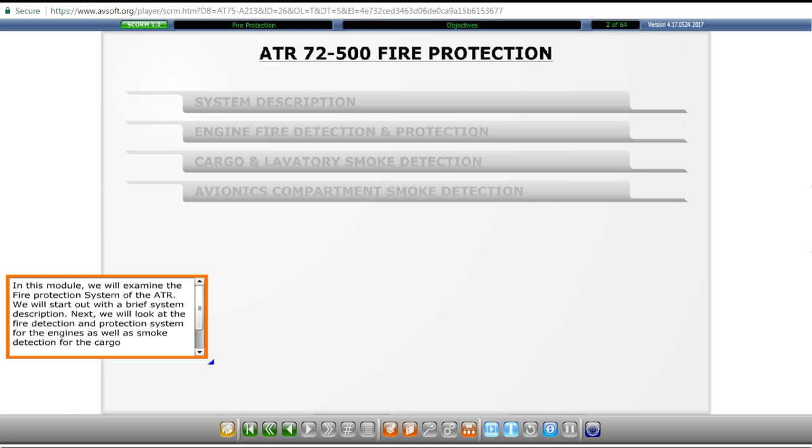In this module, we will examine the fire protection system of the ATR. We will start out with a brief system description. Next, we will look at the fire detection and protection system for the engines as well as smoke detection for the cargo compartments and the lavatory. Following that, we will look at the avionics compartment smoke detection system.

Each engine incorporates a fire detection and fire protection system. The right engine nacelle also incorporates an overheat detection system that operates when the aircraft is on the ground. If an overheat is detected in the right engine nacelle, the centralized crew alerting system will provide a warning to the crew.

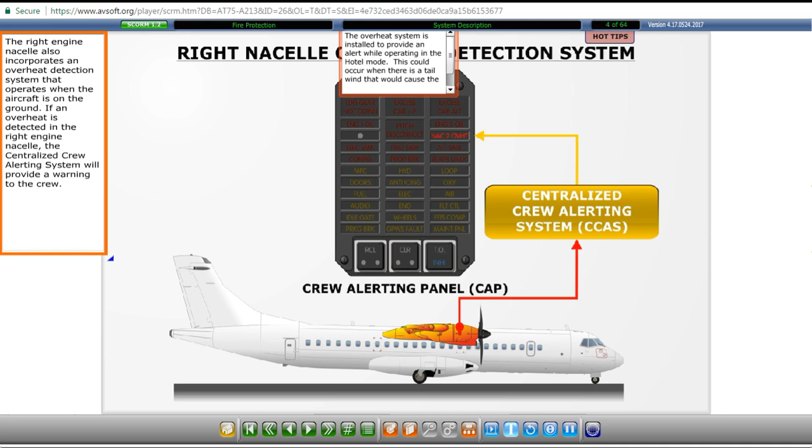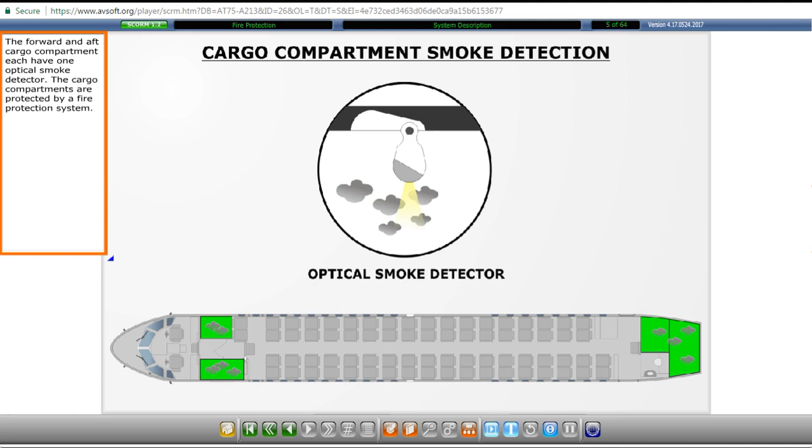The forward and aft cargo compartment each have one optical smoke detector. The cargo compartments are protected by a fire protection system. The lavatory uses a photoelectric smoke detector to provide an alert in the event there is smoke in the lavatory. A small fire protection bottle protects the lavatory waste bin.

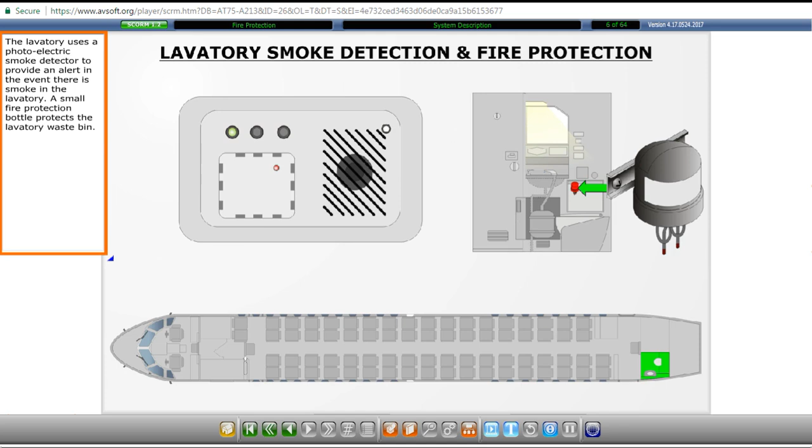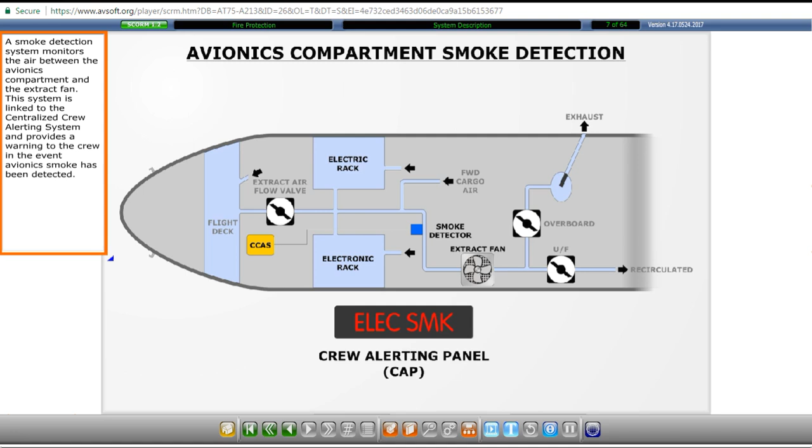A smoke detection system monitors the air between the avionics compartment and the extract fan. This system is linked to the centralized crew alerting system and provides a warning to the crew in the event avionics smoke has been detected.

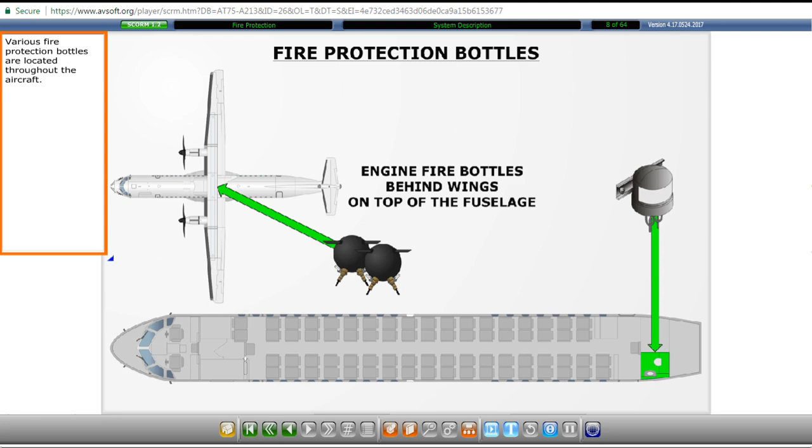Various fire protection bottles are located throughout the aircraft. The controls and indicators associated with the fire protection system are located on the overhead panel and the condition levers.

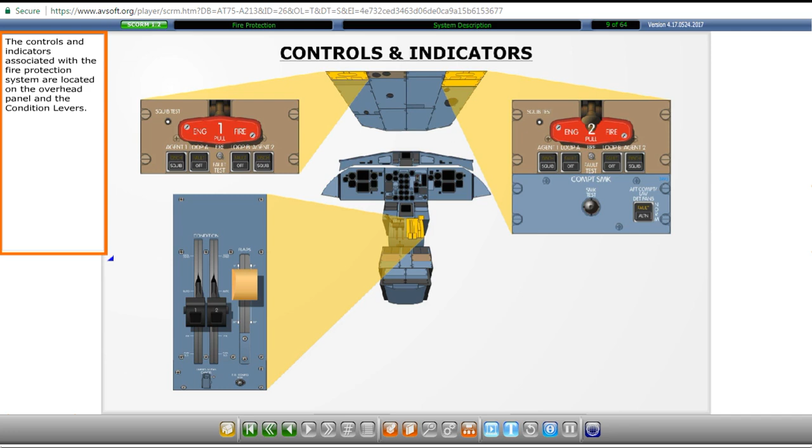Each engine incorporates a fire detection system. The system consists of two identical detection loops called Loop A and Loop B. These loops are parallel to each other and they are connected to a fire detection control unit. The loops are powered by the DC emergency bus.

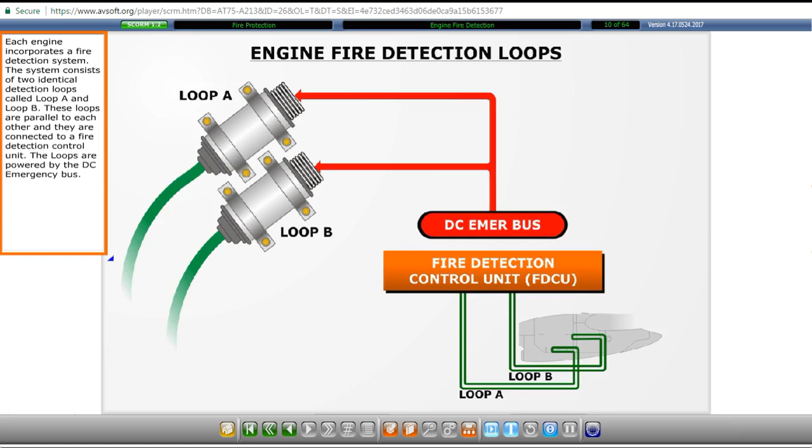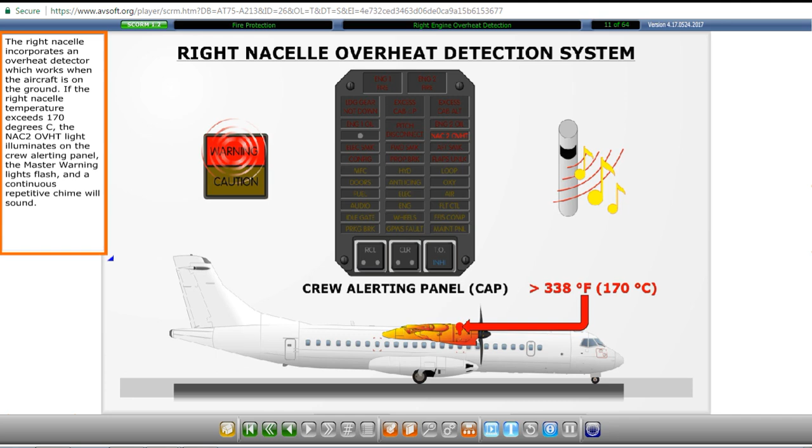The right nacelle incorporates an overheat detector which works when the aircraft is on the ground. If the right nacelle temperature exceeds 170 degrees Celsius, the nacelle 2 overheat light illuminates on the crew alerting panel, the master warning lights flash, and a continuous repetitive chime will sound.

In the event of a nacelle overheat warning in hotel mode, the right engine power lever should be brought to ground idle and the condition lever to feather, then fuel shutoff.

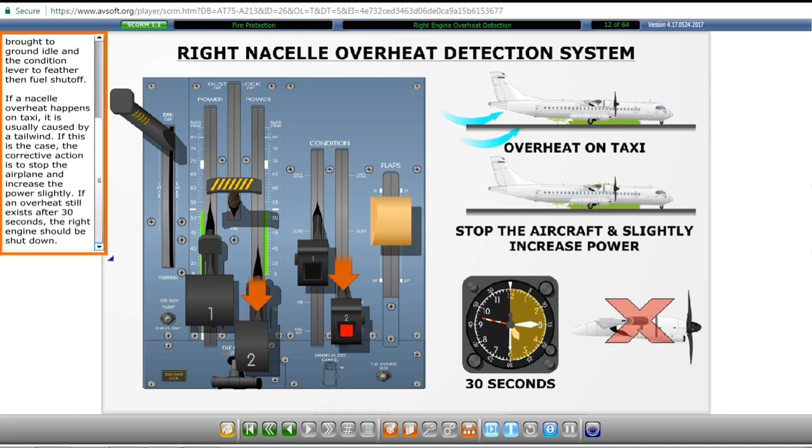If a nacelle overheat happens on taxi, it is usually caused by a tailwind. If this is the case, the corrective action is to stop the airplane and increase the power slightly. If an overheat still exists after 30 seconds, the right engine should be shut down.

Each detection loop consists of a nickel core coated with a thin eutectic salt-based layer. This core is contained in a sheath made of stainless steel. The salt changes resistance with changes in temperature.

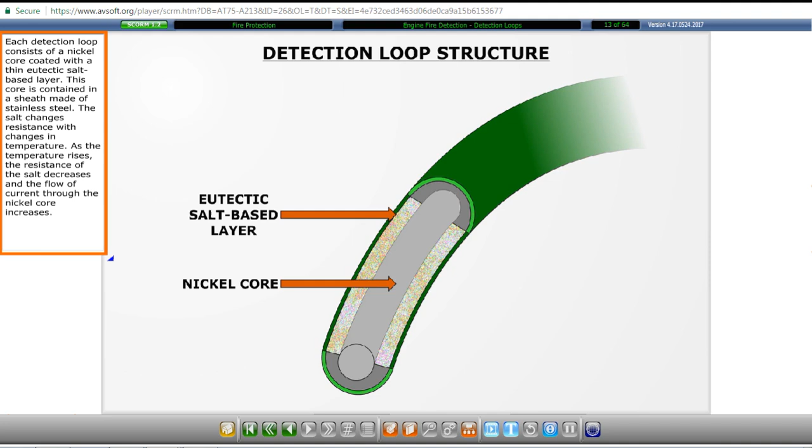As the temperature rises, the resistance of the salt decreases and the flow of current through the nickel core increases. The electrical signal flows in a continuous loop to the Fire Detection Control Unit, or FDCU. The FDCU measures the resistance in the loop as well as the capacitance.

The FDCU will trigger a fire warning if there has been a decrease in resistance and an increase in capacitance of both fire loops. Both loops must detect a fire in order to trigger a fire warning.

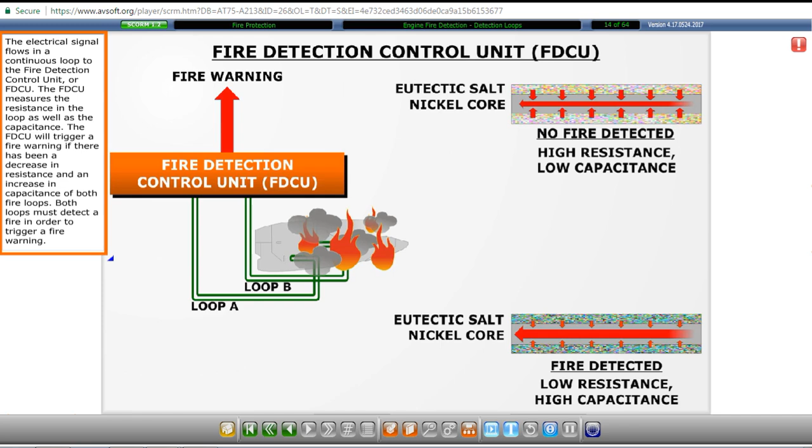If an engine fire has been detected, the continuous repetitive chime will sound, the master warning light will flash, the associated fire handle will illuminate red, a red fuel shutoff light will illuminate in the associated condition lever, and the associated engine fire light on the crew alerting panel will illuminate.

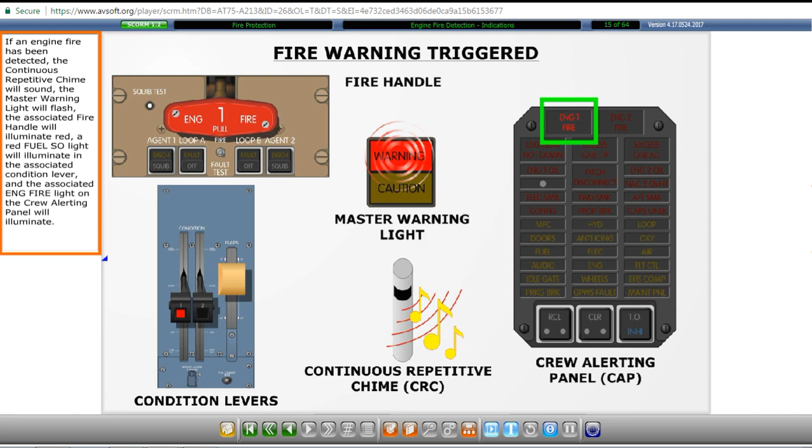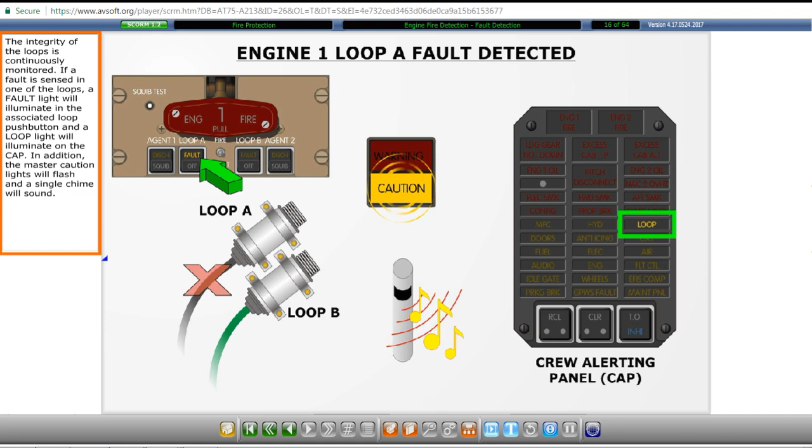The integrity of the loops is continuously monitored. If a fault is sensed in one of the loops, a fault light will illuminate in the associated loop push button, and a loop light will illuminate on the crew alerting panel. In addition, the master caution lights will flash and a single chime will sound.

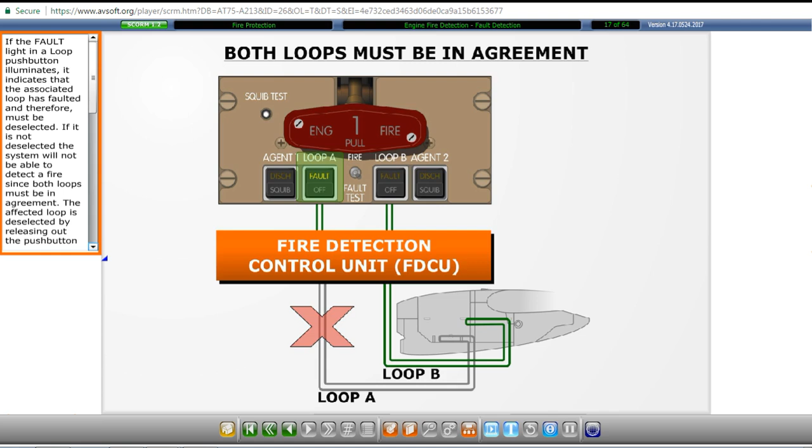If the fault light in a loop push button illuminates, it indicates that the associated loop has faulted and therefore must be deselected. If it is not deselected, the system will not be able to detect a fire since both loops must be in agreement.

The affected loop is deselected by releasing out the push button with the illuminated fault light. This reconfigures the associated fire detection system so that only the other fire detection loop is used to detect an engine fire. Click on the loop light with the illuminated fault light to reconfigure the system.

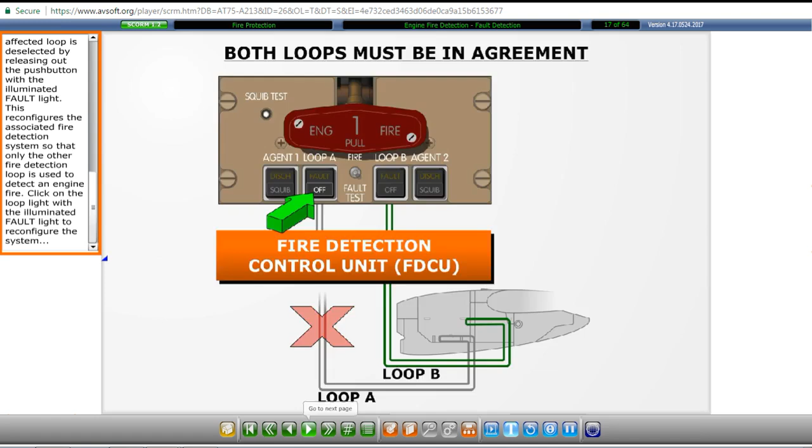If there were a break in one of the loops, the system could still detect a fire since both sections were still connected to the controller. However, if there are two breaks in a loop, there would be a segment of the loop that is not connected to the controller, and this section would be unable to detect a fire.

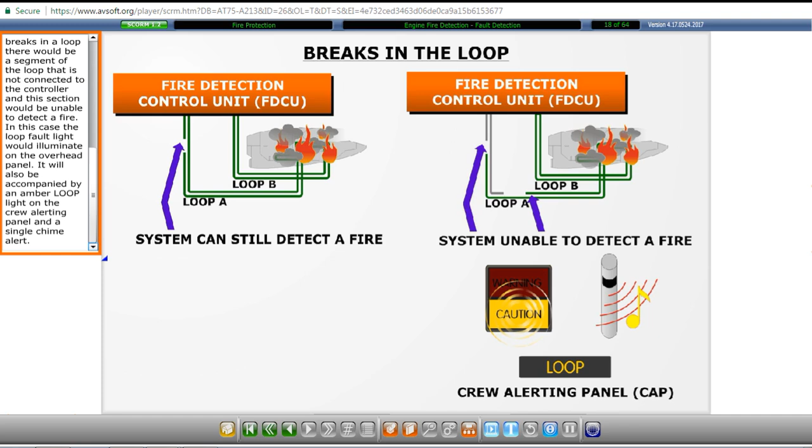In this case, the loop fault light would illuminate on the overhead panel. It would also be accompanied by an amber loop light on the crew alerting panel and a single chime alert. Note that a broken loop would cause an increase in the resistance of the circuit, but since there were no increase in capacitance, a fire warning would not be triggered.

Conversely, excessive heat in an engine compartment can trigger a fire warning even if there is no fire, for instance from a bleed leak. In this case, don't fire the bottle until it is determined that closing the bleed valve doesn't silence the fire warning.

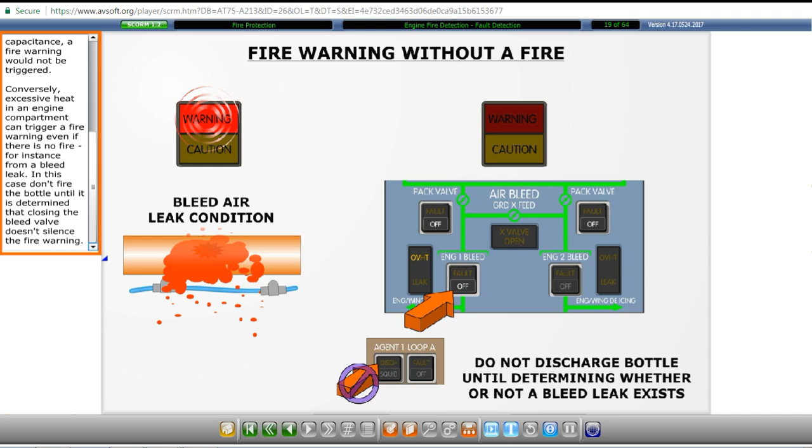Once a loop has been deselected, the off light in the associated loop push button illuminates.

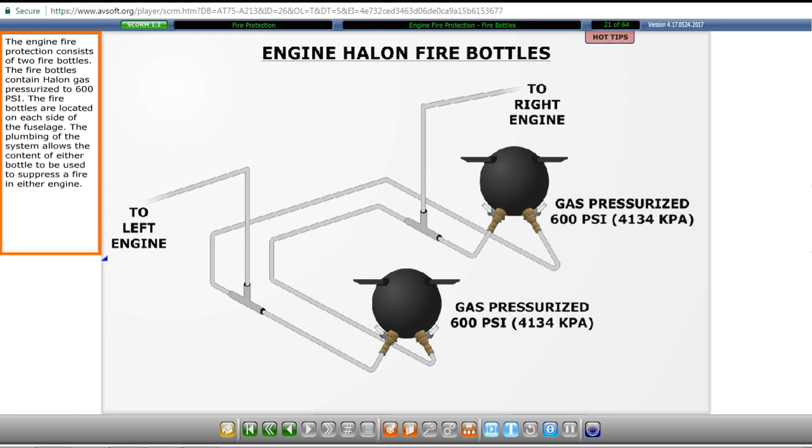The engine fire protection consists of two fire bottles. The fire bottles contain halon gas pressurized to 600 psi. The fire bottles are located on each side of the fuselage. The plumbing of the system allows the content of either bottle to be used to suppress a fire in either engine.

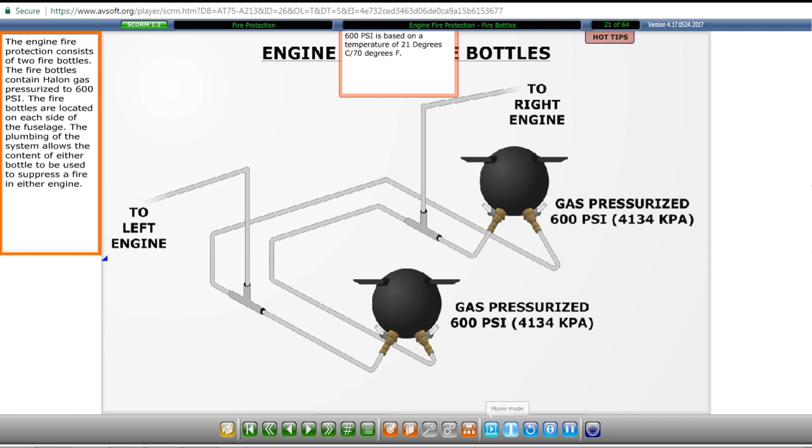The gas in the fire bottles is retained by seals. There are 2 seals per bottle. Gas is released into an engine by firing a squib which punctures the associated seal and allows the halon to flow through the associated line and into the associated engine. The squib consists of a pyrotechnic charge that is electrically detonated. Each squib can only be fired once.

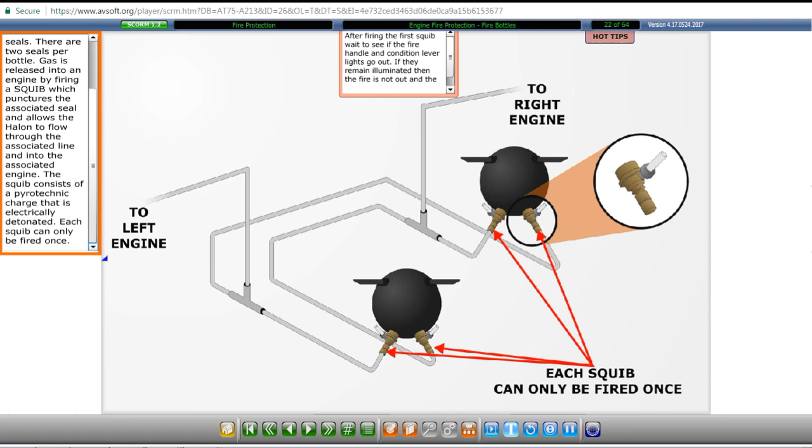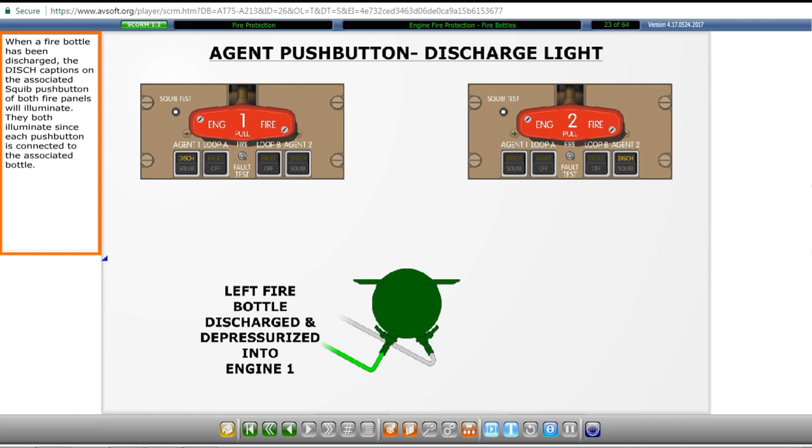When a fire bottle has been discharged, the discharge captions on the associated squib push button of both fire panels will illuminate. They both illuminate since each push button is connected to the associated bottle.

The fire bottles are plumbed to the engines in such a way that firing Agent 1 into one engine is the same as firing Agent 2 of the other engine. For example, if you fire Agent 1 into the left engine, the Agent 1 discharge light illuminates on the overhead panel for that engine. At the same time, the Agent 2 discharge light illuminates for the right engine on that side of the overhead panel.

2 identical engine fire panels are located on the overhead panel. Each incorporates a fire handle, loop push button, and 2 agent push buttons.

When a fire has been detected, the associated fire handle will illuminate red. In addition, the continuous repetitive chime will sound, the master warning light will flash, a red fuel shutoff light will illuminate in the associated condition lever, and the associated engine fire light on the crew alerting panel will illuminate.

Click on the illuminated fire handle to continue.

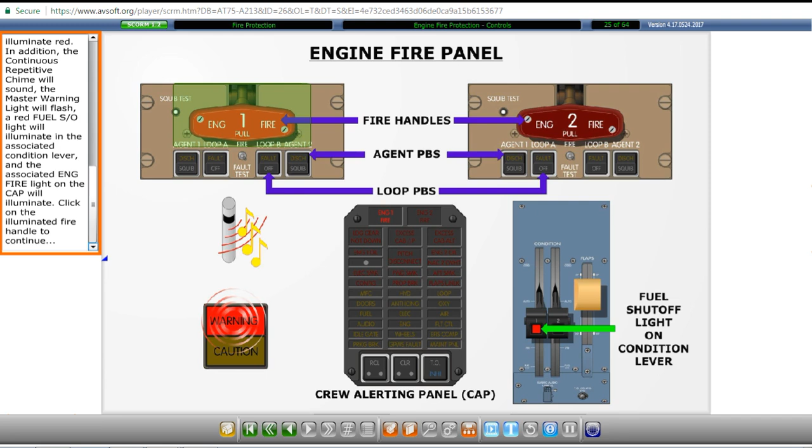The fire handles are mechanically locked by safety-wired spring latches. A latch can be thumb-released in order to allow the fire handle to be pulled down. Make sure that the handles are pushed in prior to pre-flight checking the system.

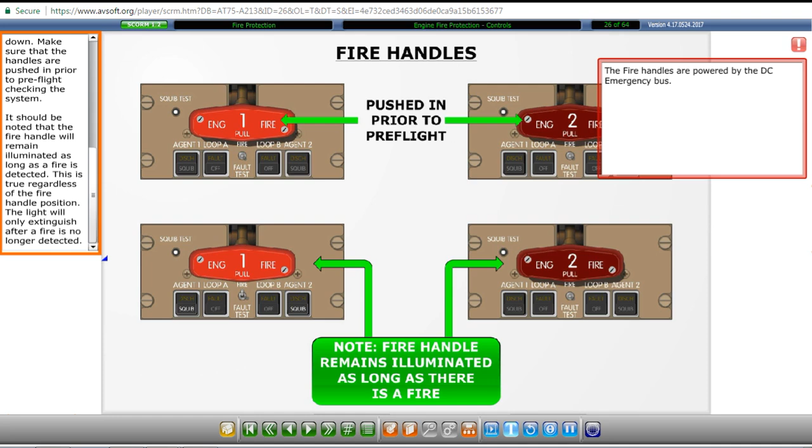It should be noted that the fire handle will remain illuminated as long as a fire is detected. This is true regardless of the fire handle position. The light will only extinguish after a fire is no longer detected.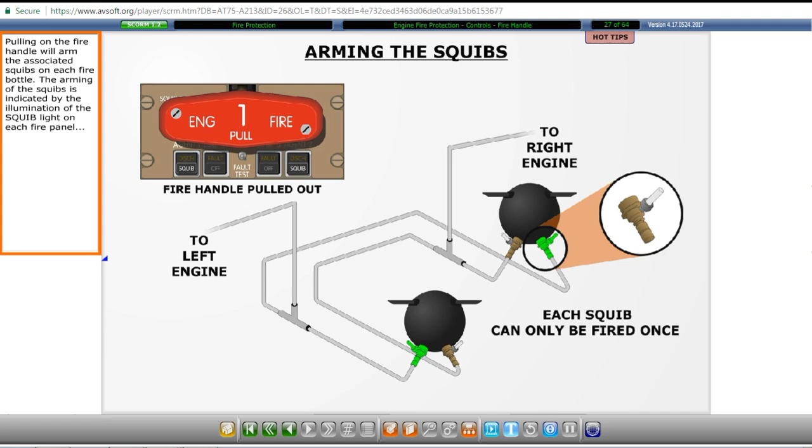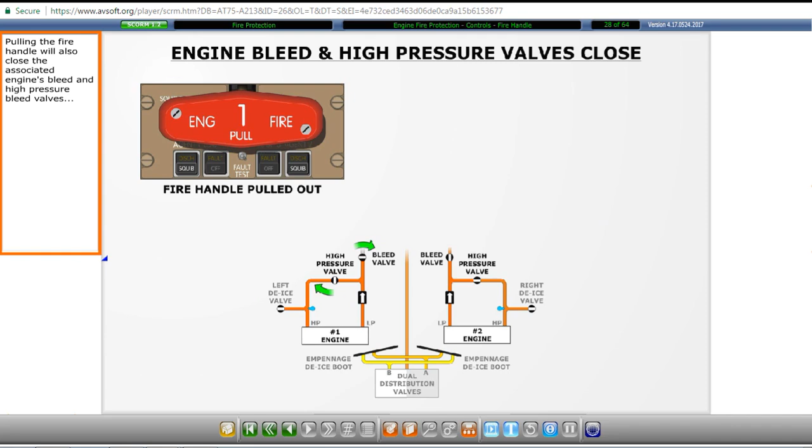Pulling on the fire handle will arm the associated squibs on each fire bottle. The arming of the squibs is indicated by the illumination of the squib light on each fire panel.

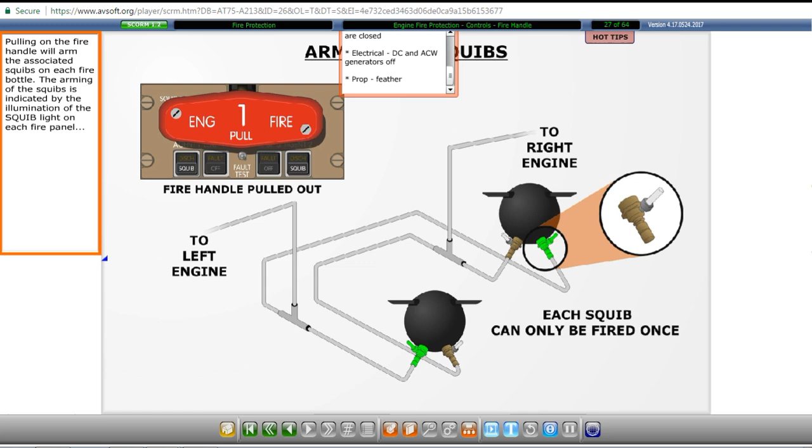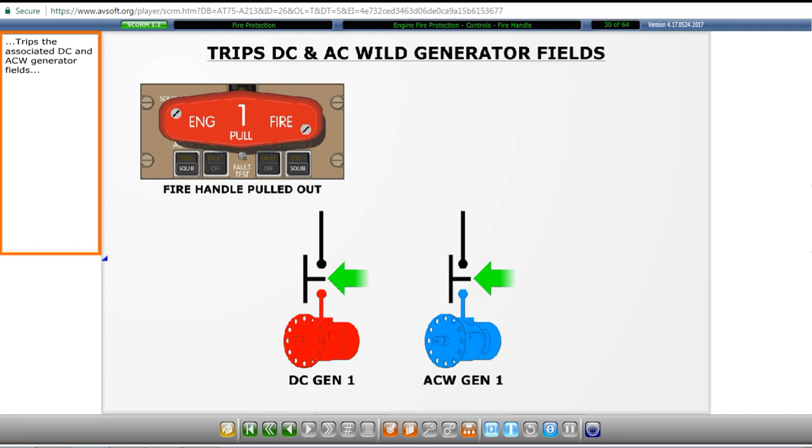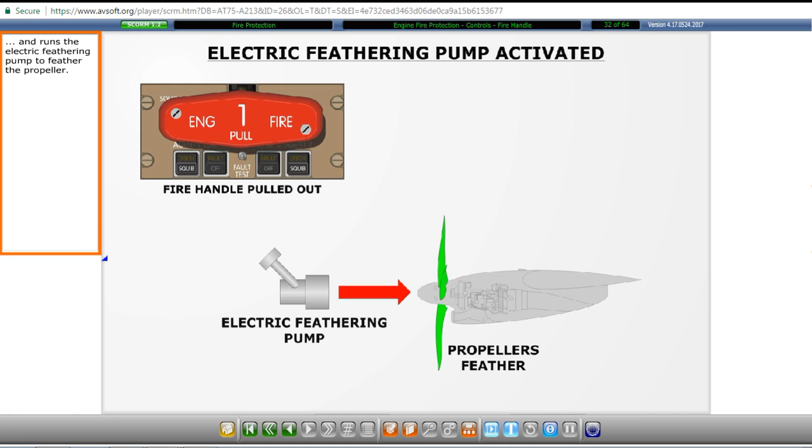Pulling the fire handle closes the associated engine pneumatic de-ice valve and isolation valve, trips the associated DC and AC wild generator fields, closes the engine's low-pressure fuel valve, and runs the electric feathering pump to feather the propeller.

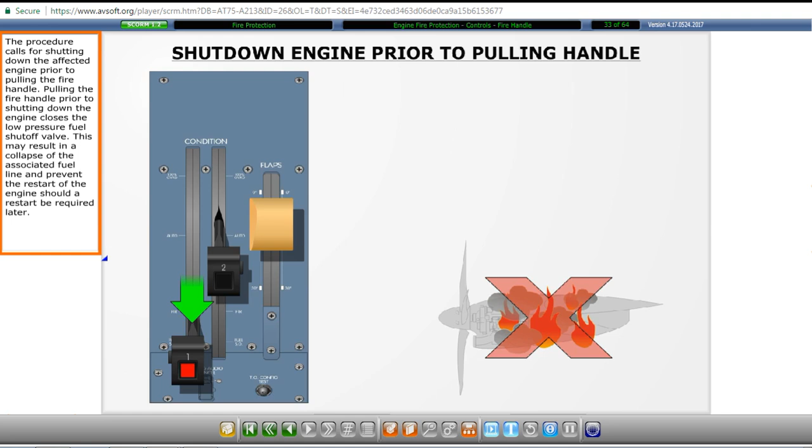The procedure calls for shutting down the affected engine prior to pulling the fire handle. Pulling the fire handle prior to shutting down the engine closes the low-pressure fuel shutoff valve. This may result in a collapse of the associated fuel line and prevent the restart of the engine should a restart be required later.

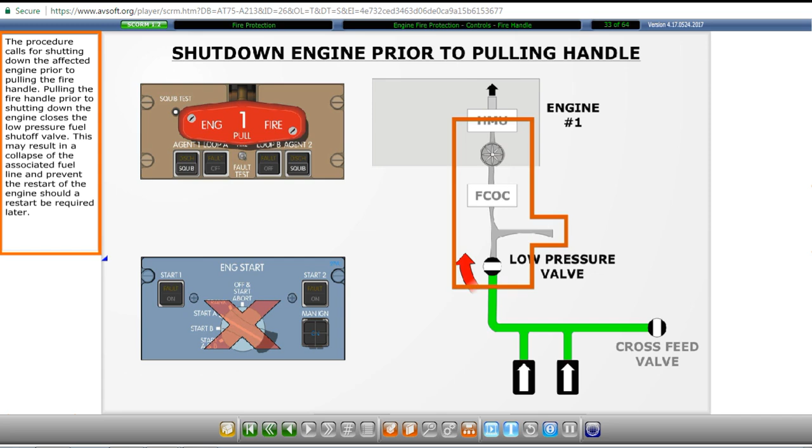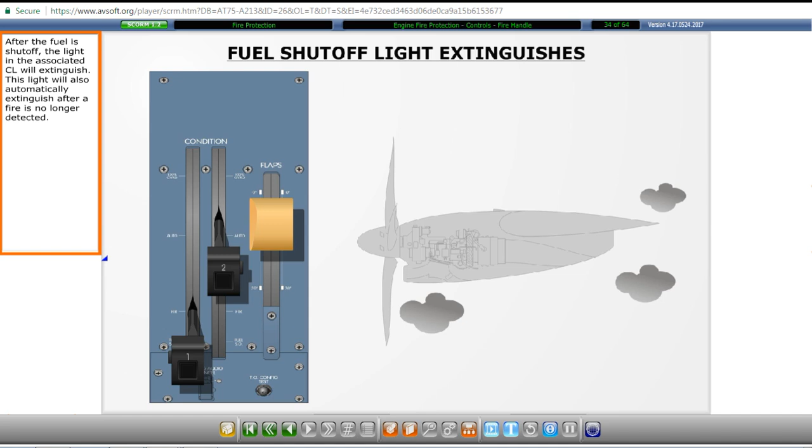After the fuel is shut off, the light in the associated condition lever will extinguish. This light will also automatically extinguish after a fire is no longer detected.

After a fire handle has been pulled, one of the fire bottles can be discharged into the engine by pressing one of the illuminated squib lights. Pressing a squib push button sends an electric charge to the associated squib, which fires and punctures the associated seal. This releases the halon into the associated engine. Click on the number 1 squib push button to fire the bottle into the left engine.

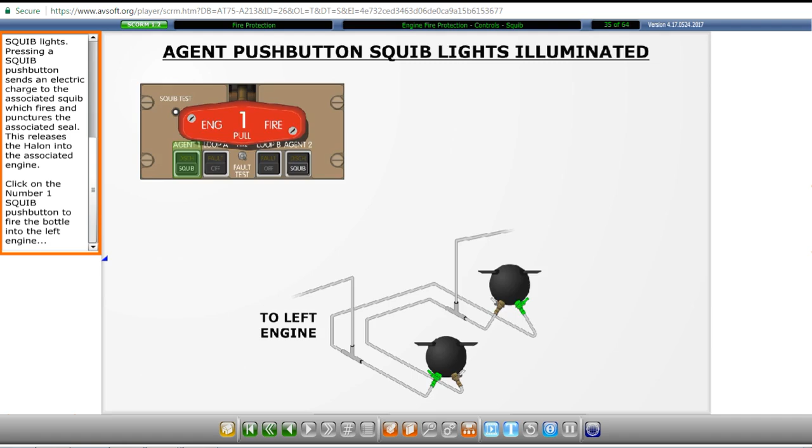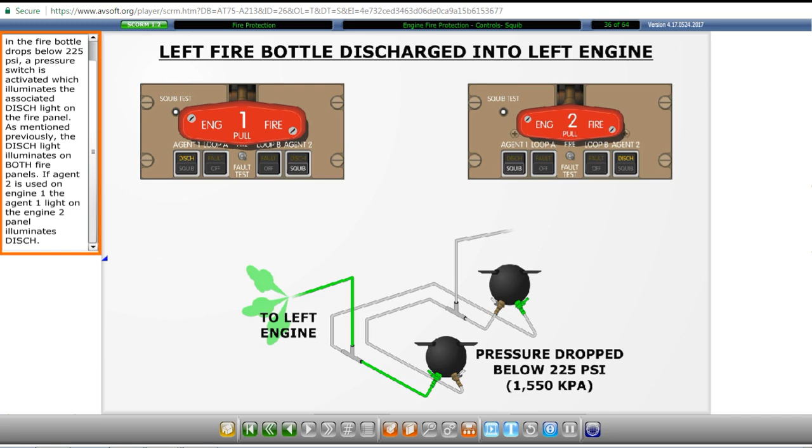When pressure in the fire bottle drops below 225 psi, a pressure switch is activated which illuminates the associated discharge light on the fire panel. As mentioned previously, the discharge light illuminates on both fire panels. If Agent 2 is used on Engine 1, the Agent 1 light on the Engine 2 panel illuminates discharge.

The engine fire protection system is tested with the test switch on the fire panel and is used during pre-flight. The switch is spring-loaded to the neutral position and enables the selection of a fire test or a fault test. Click on the fire position to test the fire protection system.

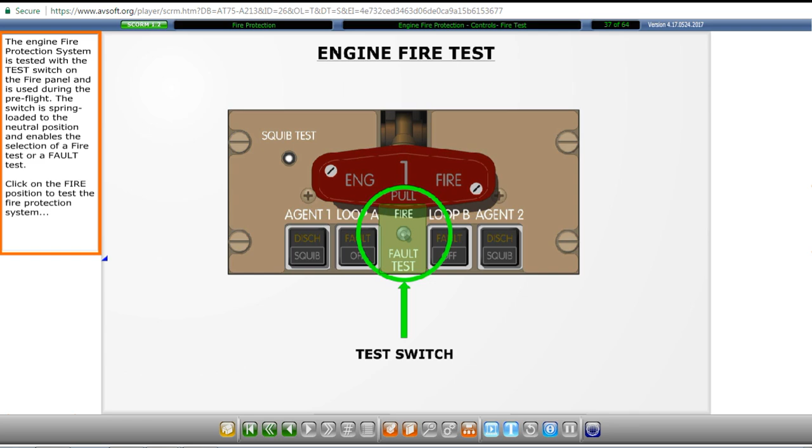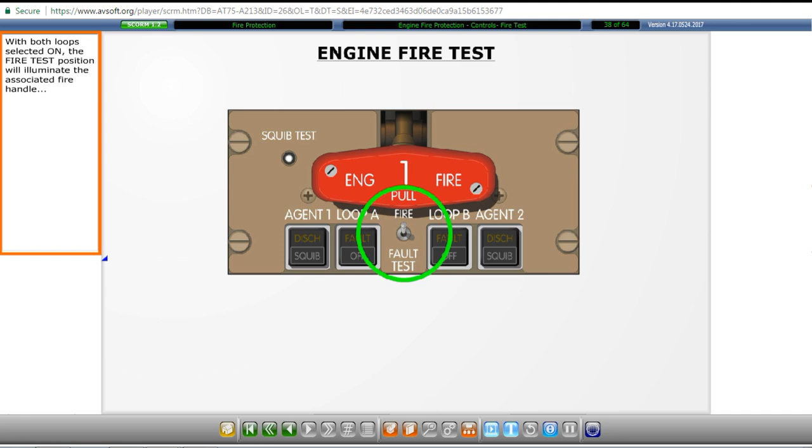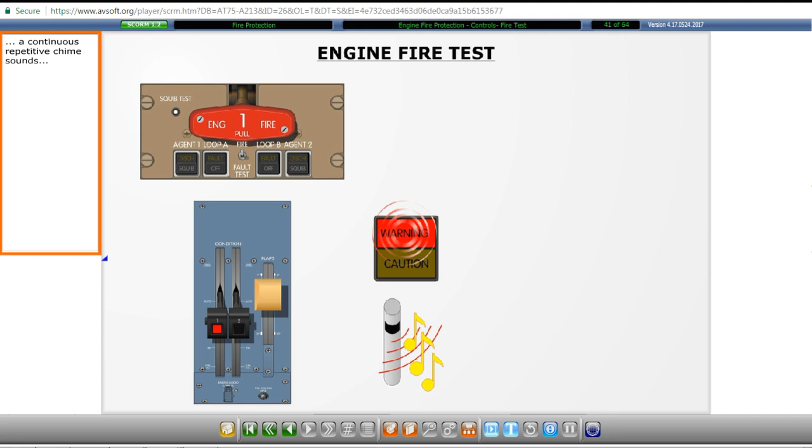With both loops selected on, the fire test position will illuminate the associated fire handle, and illuminate a fuel shutoff light in the associated condition lever if the lever is not in the fuel cutoff position. The red master warning lights will flash, a continuous repetitive chime sounds, and it illuminates the associated engine fire light on the crew alerting panel.

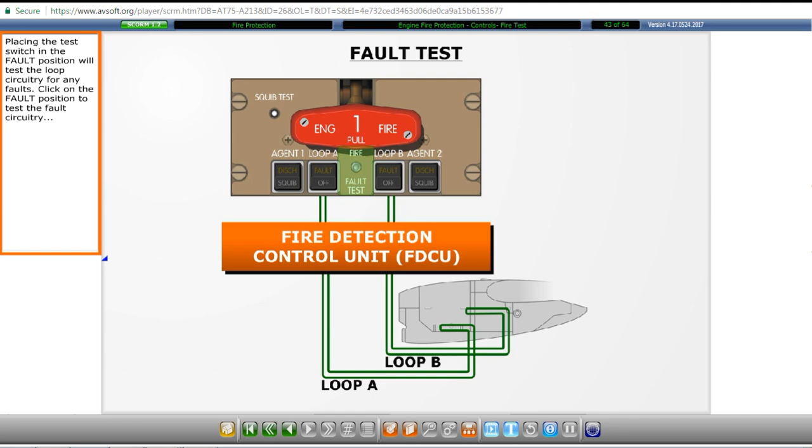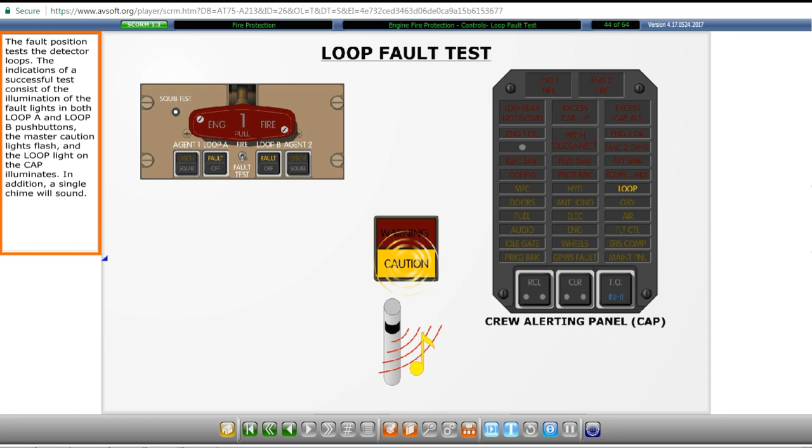Placing the test switch in the fault position will test the loop circuitry for any faults. This tests the detector loops. The indications of a successful test consist of the illumination of the fault lights in both Loop A and Loop B push buttons, the master caution lights flash, and the loop light on the crew alerting panel illuminates. In addition, a single chime will sound.

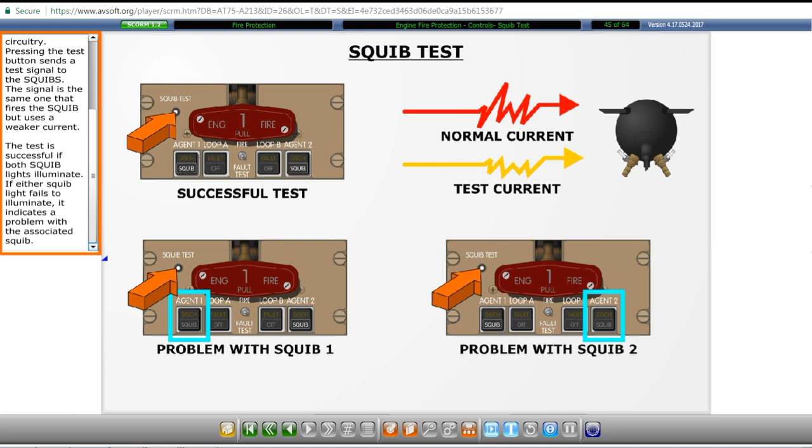The squib test push button is used to check the continuity of the squib circuitry. Pressing the test button sends a test signal to the squibs. The signal is the same one that fires the squib but uses a weaker current. The test is successful if both squib lights illuminate. If either squib light fails to illuminate, it indicates a problem with the associated squib.

Three smoke detectors are installed on the passenger configuration aircraft. One detector is in the forward cargo compartment, and another one is in the aft cargo compartment. The third smoke detector is in the lavatory vent line.

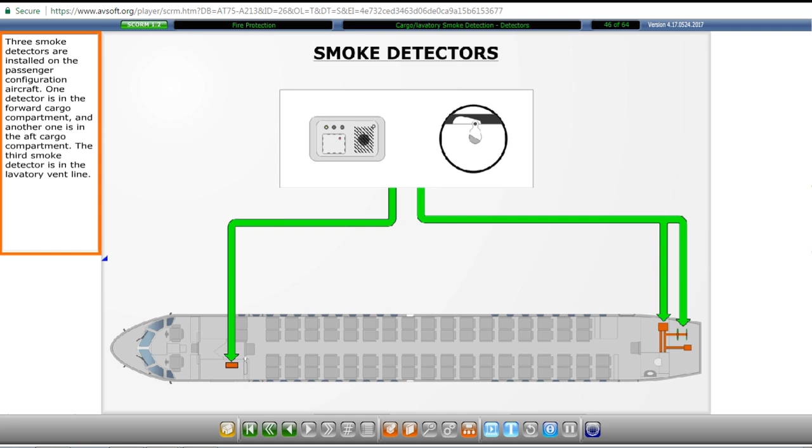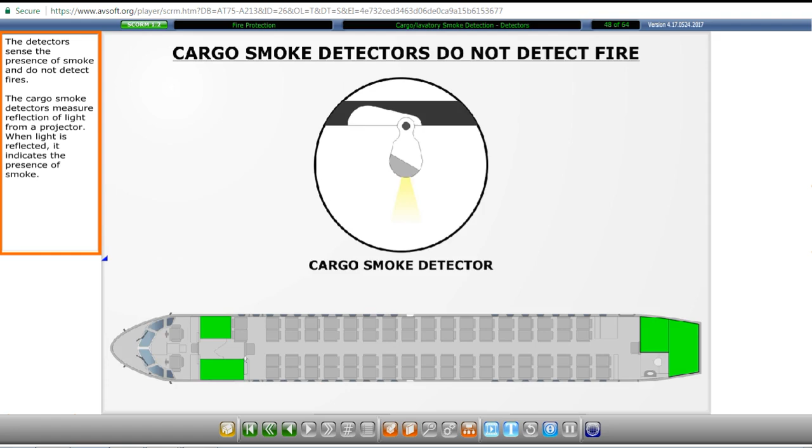The smoke detectors are powered by the DC Essential bus. The detectors sense the presence of smoke and do not detect fires. The cargo smoke detectors measure reflection of light from a projector. When light is reflected, it indicates the presence of smoke. The lavatory smoke detector is equipped with a photoelectric smoke detector. A smoke warning is triggered when smoke is detected by this sensor.

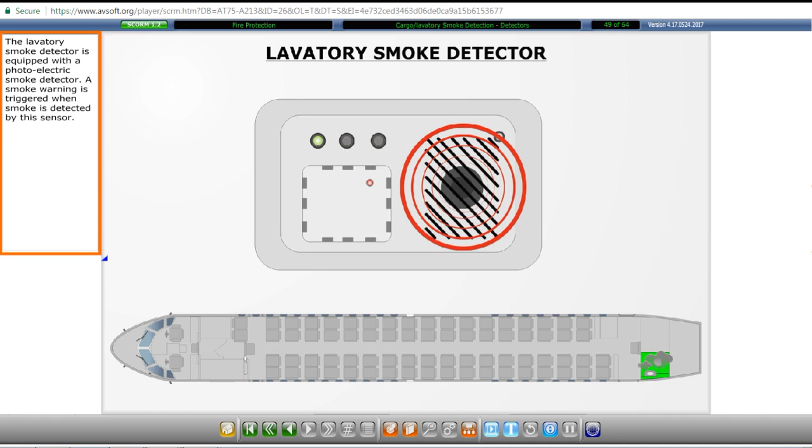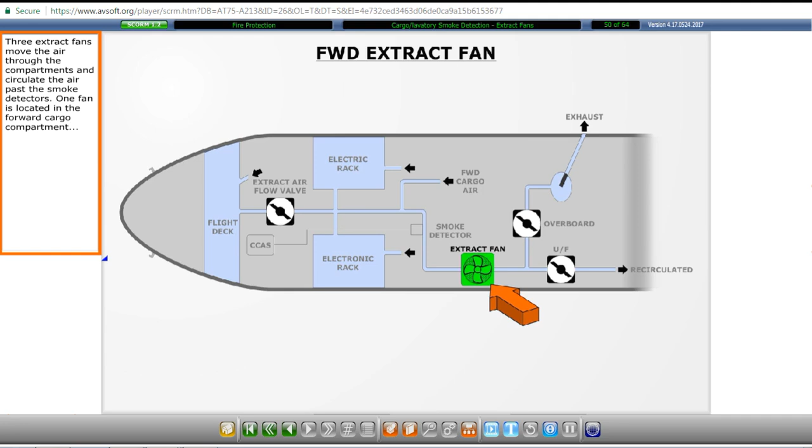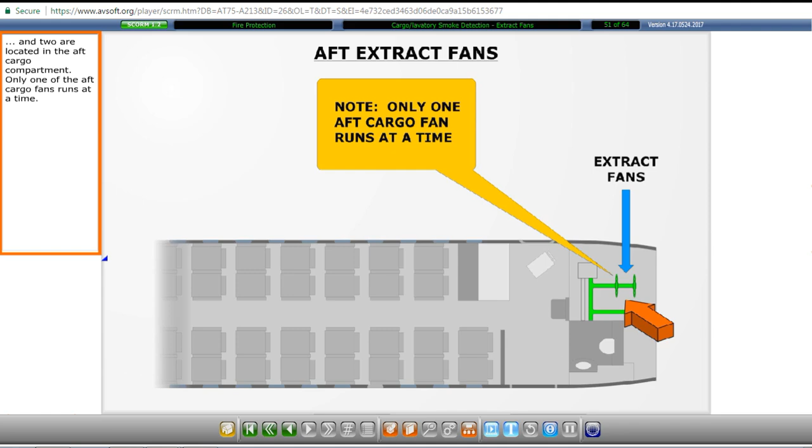Three extract fans move the air through the compartments and circulate the air past the smoke detectors. One fan is located in the forward cargo compartment, and two are located in the aft cargo compartment. Only one of the aft cargo fans runs at a time. The extract fans are powered by the AC standby bus.

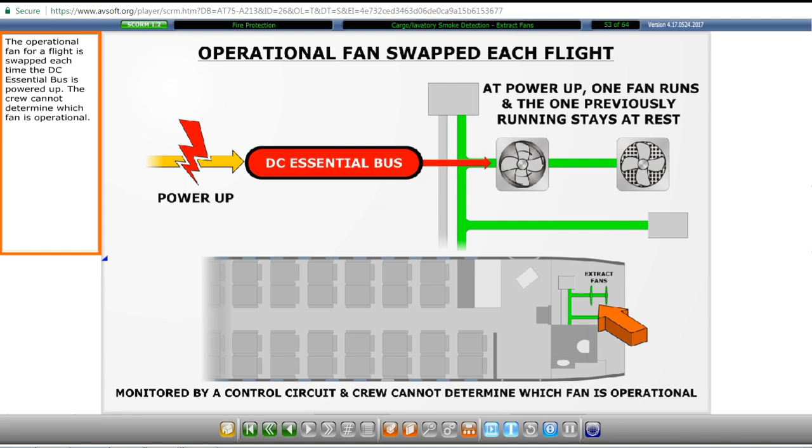The operational fan for a flight is swapped each time the DC Essential bus is powered up. The crew cannot determine which fan is operational. If one of the fans fails, a CCAS alert is activated and the fault light in the aft compartment lav detector fan's push button illuminates. The alternate fan can be selected by pressing the aft compartment lav smoke detector push button. This will cause the alternate caption to illuminate in the push button.

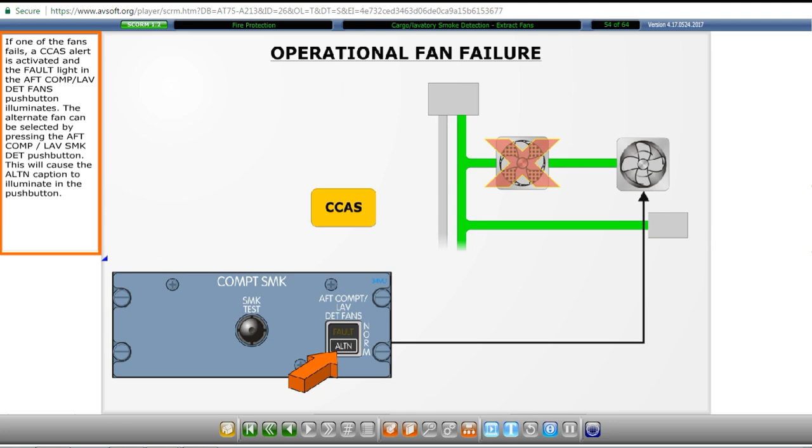If smoke is detected in the forward or aft cargo compartment, it will be indicated by the flashing of the master warning lights, the continuous repetitive chime will sound, and the forward smoke or aft smoke light will illuminate red on the crew alerting panel.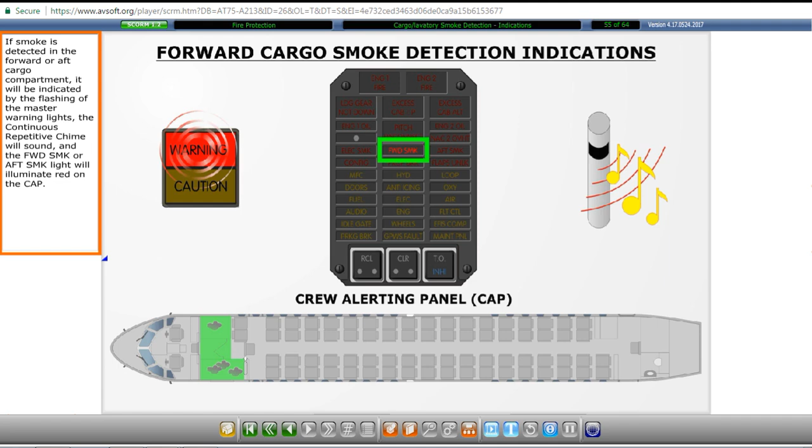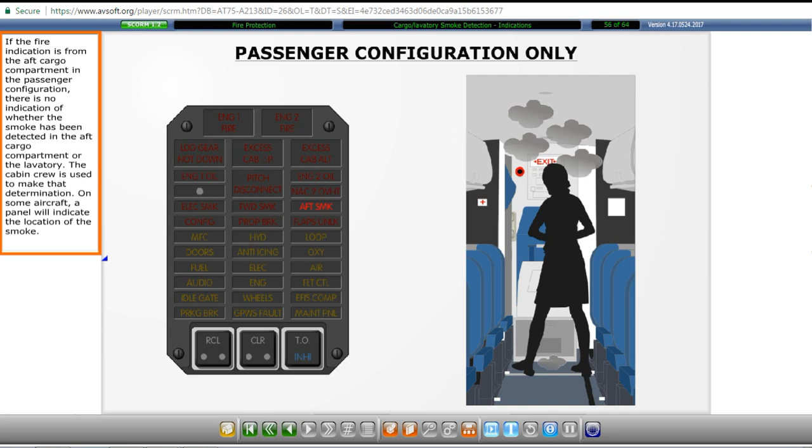If the fire indication is from the aft cargo compartment in the passenger configuration, there is no indication of whether the smoke has been detected in the aft cargo compartment or the lavatory. The cabin crew is used to make that determination. On some aircraft, a panel will indicate the location of the smoke.

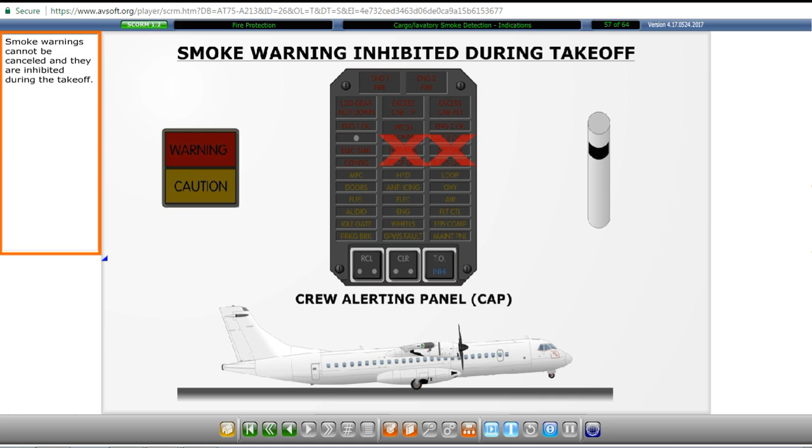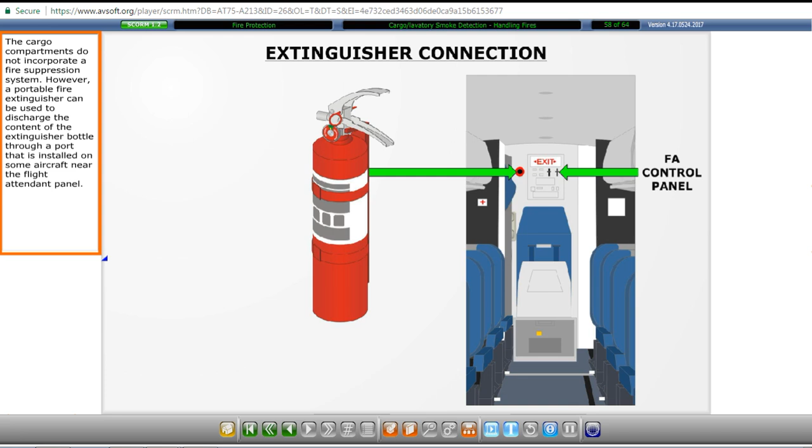Smoke warnings cannot be canceled and they are inhibited during takeoff. The cargo compartments do not incorporate a fire suppression system. However, a portable fire extinguisher can be used to discharge the content of the extinguisher bottle through a port that is installed in some aircraft near the flight attendant panel.

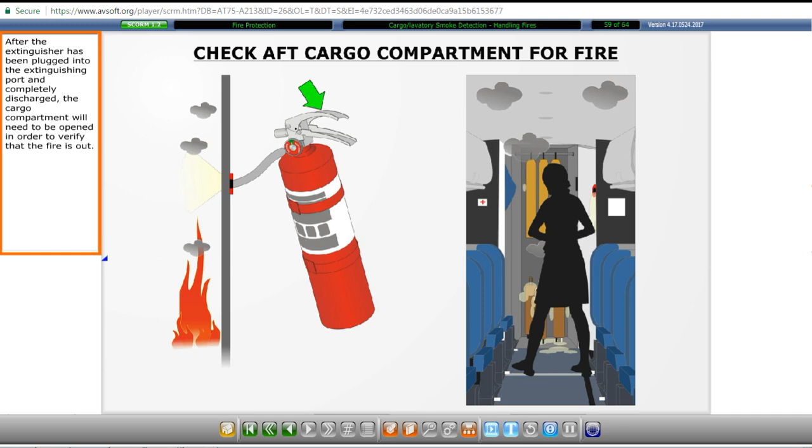After the extinguisher has been plugged into the extinguishing port and completely discharged, the cargo compartment will need to be opened in order to verify that the fire is out.

On cargo-configured aircraft, Zone 1 is plumbed to a fire extinguisher located behind the first officer's seat. It is also fitted with a stainless steel floor pan and should be used to contain flammable goods and corrosives.

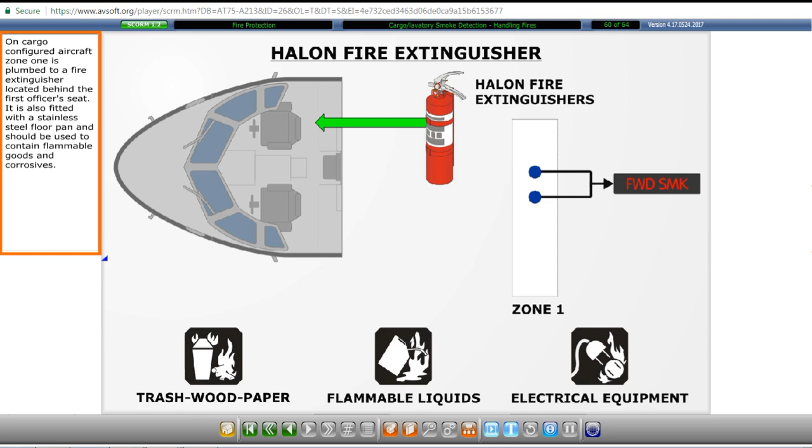A small automatic fire bottle is located in the lavatory. The tip of the fire bottle is directed to the wastebasket and consists of a fusible plug. The plug will melt when the temperature exceeds 78 degrees Celsius. There are no indications in the flight deck of the discharge of this fire bottle.

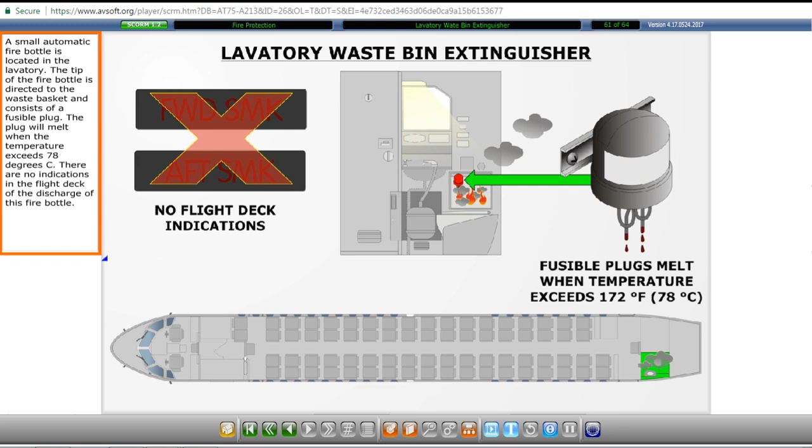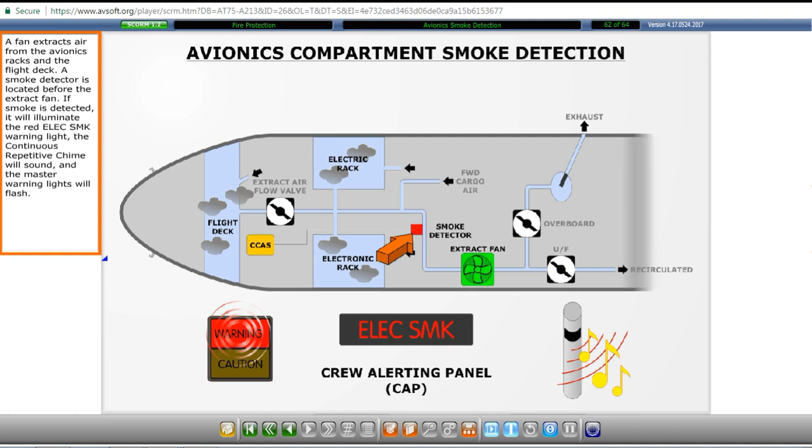A fan extracts air from the avionics racks and the flight deck. A smoke detector is located before the extract fan. If smoke is detected, it will illuminate the red electric smoke warning light, the continuous repetitive chime will sound, and the master warning lights will flash. If the red electric smoke warning light illuminates and you do not detect any smoke in the flight deck, it indicates that the smoke is coming from the avionics compartment.

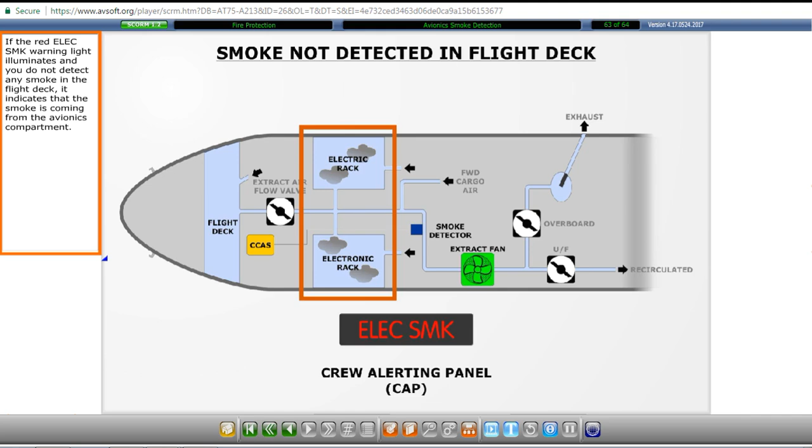This concludes the fire protection module.

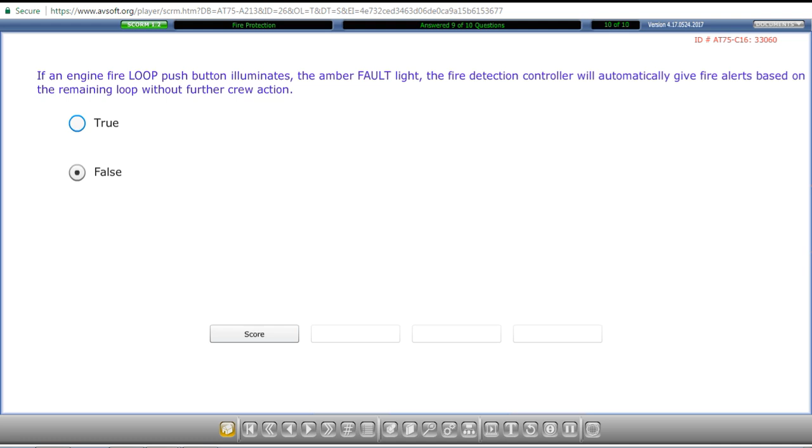Each engine incorporates a fire detection system. The system consists of two identical detection loops called Loop A and Loop B. These loops are parallel to each other, and they are connected to a fire detection control unit. The loops are powered by the DC emergency bus.